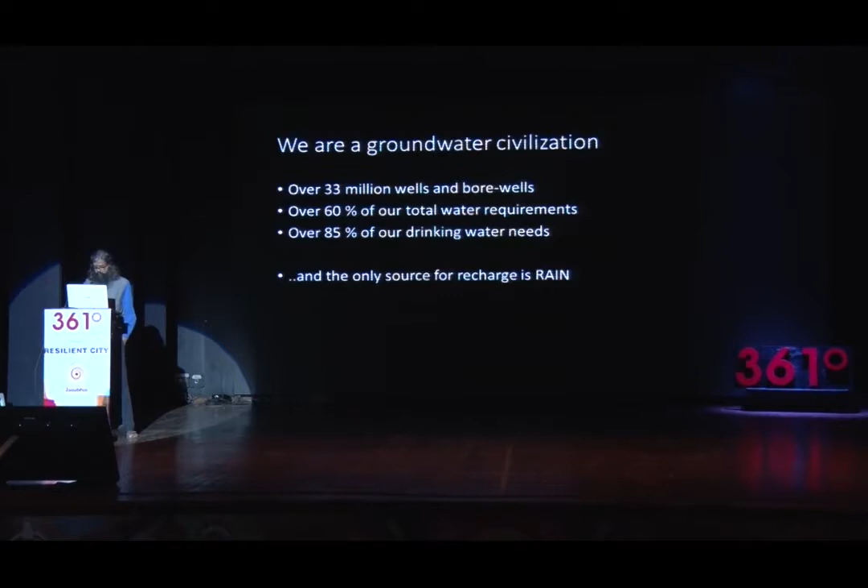Because it starts way back from the Indus Valley civilization, which is the culture of the well. Mohenjo-daro, Harappa, Lothal has this well, 2900 BC, 2300 BC, up to 1900 BC. Though called the Indus Valley civilization, the fact is that these people, and this was an urban civilization, mind you, drew their water requirements from wells.

And it's legendary, everybody knows in the Indian context, students know especially, that we had excellent drainage systems there, and that now we have to go to a Swachh Bharat to recreate what the Indus Valley civilization had done. Most importantly, wells were the source of water then. Wells and bore wells continue to be sources of water for us now.

So if you come to Sarnath, where the Buddha gave his first pravachan, his first preachings to his disciples, Sarnath is near Banaras, Varanasi. Sarnath does not have a river or a lake. Sarnath has a well, a series of wells. This is where the Ashoka pillar came from. Sarnath has this particular well. The well has water, and the water is sweet.

So are we privileged to be drinking the same water that Gautam Siddhartha drank? Are we blessed to not only listen to his spiritual sayings, but also be part of the endeavor of accessing good, clean water that the Buddha was part of? These are the kind of sustainability ideas around technologies, around artifacts, that we need to remember that we have in India. And when we design sustainably, can you think of anything sustainable for 2,500 years? Because we are talking about 260 BC, right over here.

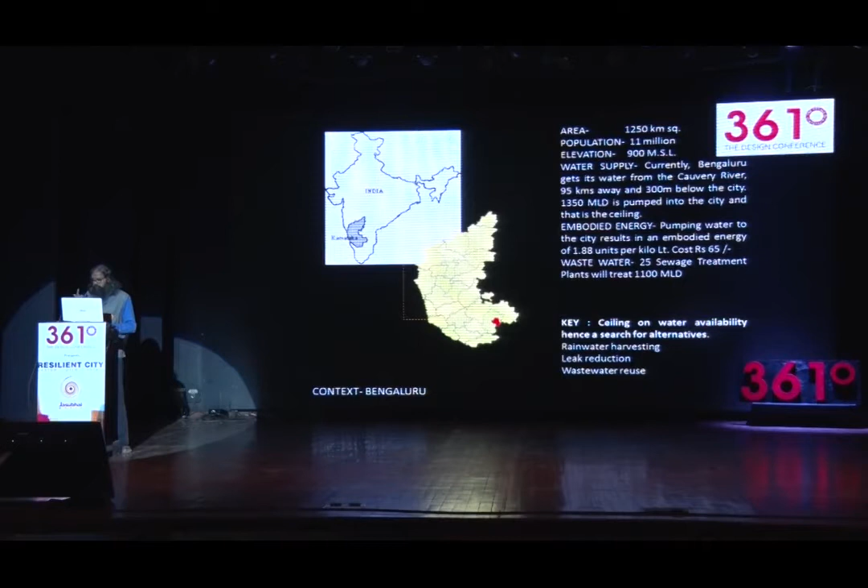But here's typical India, and this Indian city called Bangalore sits with 11 million people, 1,250 square kilometers area, sits on a ridge line, 900 meters, and is dependent on a single source called the Cauvery. There comes the challenge. How do you create resilience when your source of water is only one? And this is the city in a river basin.

So when we design resilient cities, we have to imagine ourselves hydrologically, place ourselves in a river basin and see how sustainable we are vis-a-vis the river basin. It cannot be the city itself which talks to its own waters. It has to talk to the river basin. And there are 4 dams upstream of the city of Bangalore, 4 dams in various districts on the Cauvery River. And all 4 dams play themselves to provide water to the city.

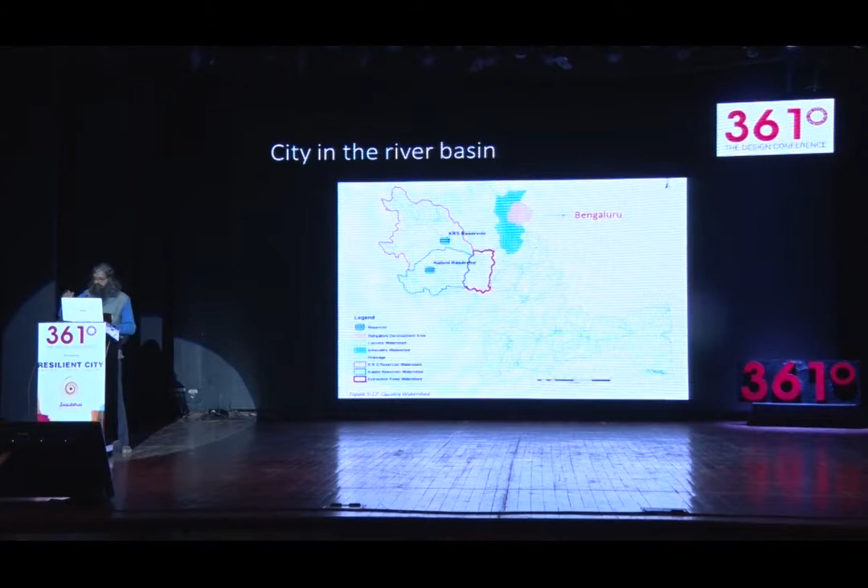The operation of these 4 dams works around provisioning water to the city first. Then if there is surplus water, that is used for agriculture, and if there's further surplus water, then it goes for industries. That's the kind of dependency we have created, that entire river basins have to move to feed water to a city. And here in this particular case, the Cauvery Basin waters are completely utilized. Not a drop of river water reaches the sea, except during heavy rainy seasons.

And even that water is exhausted, therefore the city has to think of going to another river basin 320 kilometers away to get water. The one other option before it is, can it go local? Can it do rainwater harvesting? Can it do wastewater reuse? And can it do demand management? This local versus the far away is the constant tension under which cities work.

And meanwhile, the city itself urbanizes, destroys green cover, destroys wetlands and lakes, prevents recharge by crusting, and I'll come to that, has intense rainfall events due to urban heat island effect, floods, urban flooding is a new phenomenon, and of course pollutes streams and lakes and groundwater within itself.

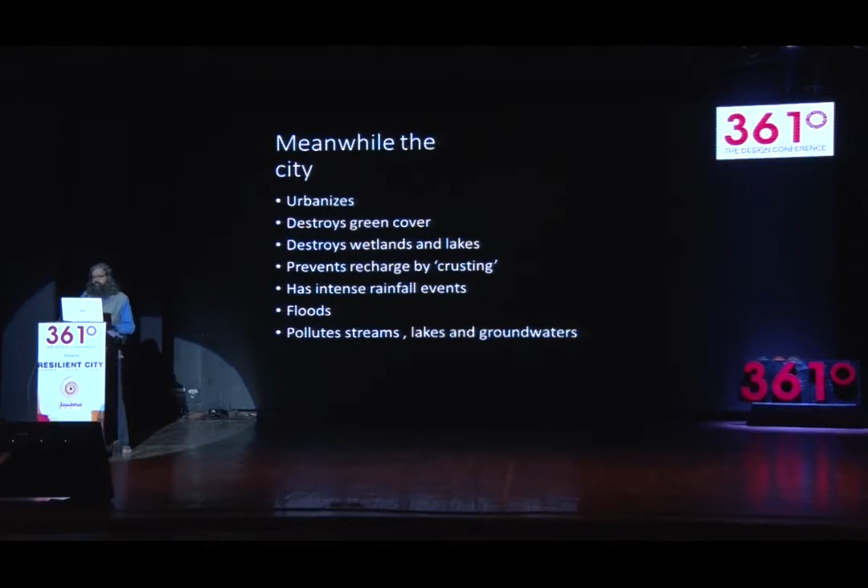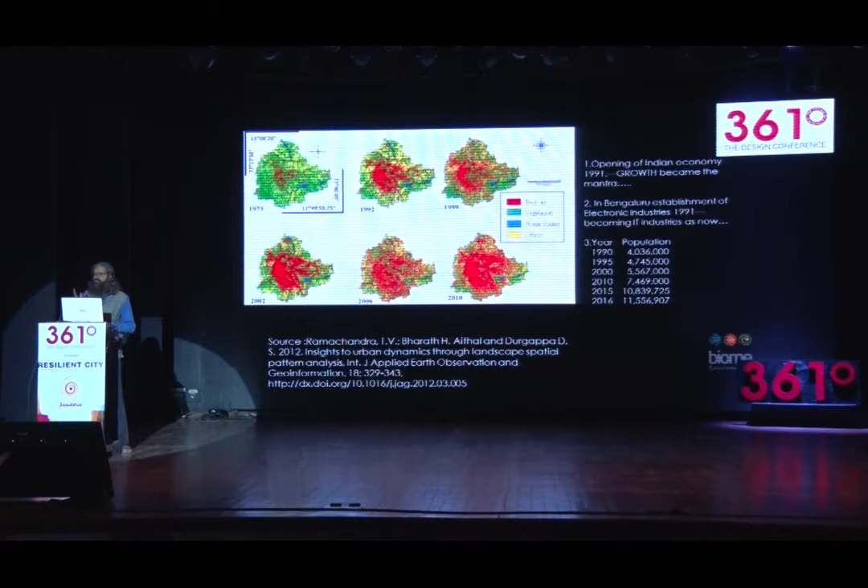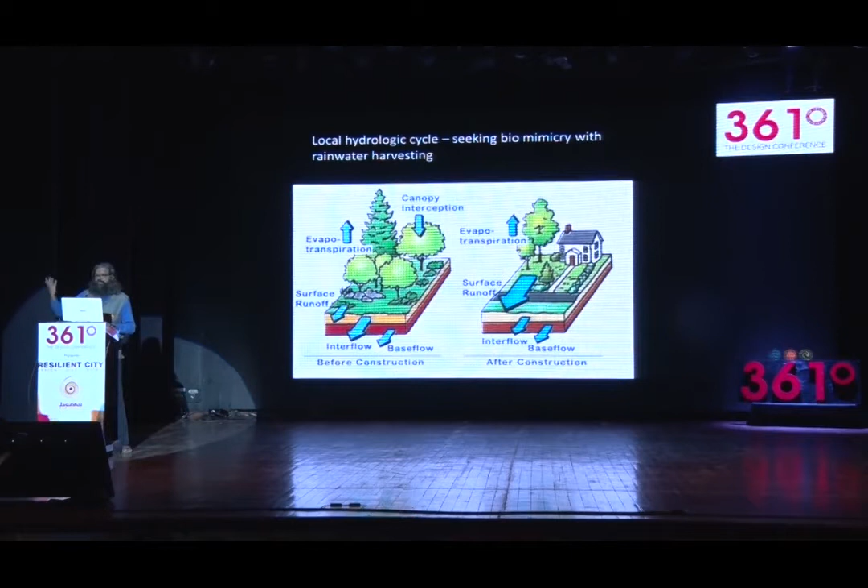And in this context, we have to start to manage water. So, what the city has done is to work around rainwater harvesting from individual homes. You start with the smallest unit, which is a home, and you look at the hydrological cycle in this home, right? What happens to the hydrological cycle on a 150 square meter plot area or site area? And I'll give you the numbers.

If the site is unbuilt, and those are the figures on the left, the surface runoff is between 10 and 15%. Recharge, which goes to the groundwater, is between 8 and 10%. 75% of the water stays in 1 meter of soil and evapotranspires.

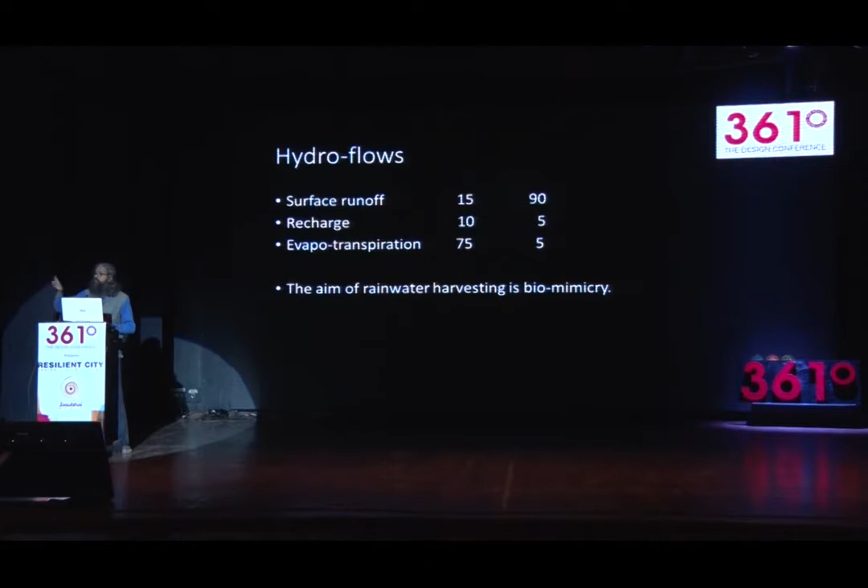The moment you build on it, the runoff now goes from 15 to 90. Actually, it goes to 100. So you've increased runoff from a site 6 times or 7 times, and therefore you're left with urban floods and you're left with no recharge. How do you reverse it is the basis of policy, bylaws, and design.

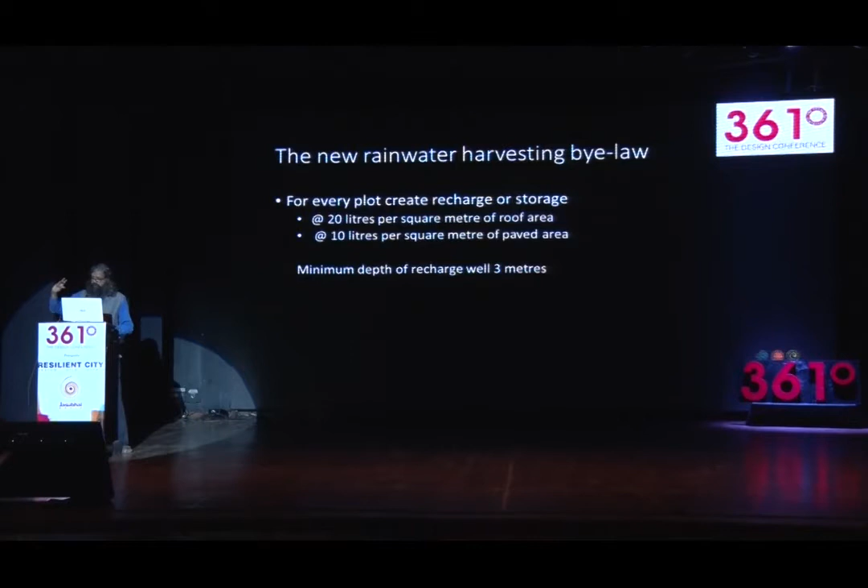And how you do that is by putting forward a law which says that for every square meter of roof area, the plot has to be responsible for 20 liters of rainwater storage or recharge. And for every square meter of paved area, you have to become responsible for 10 liters of storage or recharge. And when you make the recharge structure on the plot, you have to make sure that it's about 3 meters so that it bypasses the clay layer and actually gets into the aquifer. Simple policy bylaws can follow from understanding hydrological cycles at a site level.

And easy ways of harvesting rainwater, I don't have to show it to you. We have, I think, about 100,000 rainwater harvesting systems in Bangalore. The number can get even bigger. Is to stock up in rain barrels as such.

And then you move from the individual house or site to what we call layouts. These are essentially gated communities. And what do gated communities do? This is the design challenge for water. How can we convert water from an individual resource, a private resource, where everybody can sink a borewell and draw water, competing with the other? For example, in this layout, 360 plots, not connected to the city utility. So you would have had 360 straws, 1,000 feet deep borewells, taking water out from the same bottle, competing with each other. How do you reverse the process?

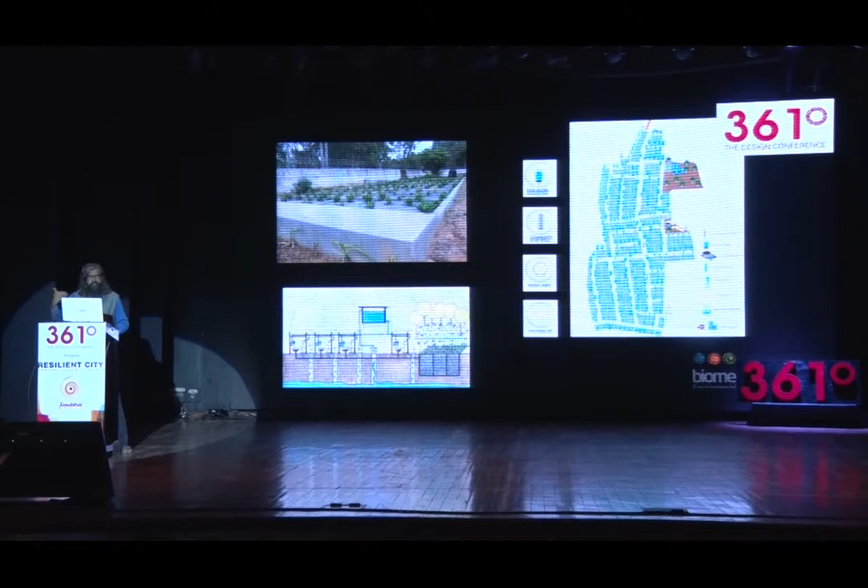The process is reversed by turning groundwater into a common pool resource. And what does a common pool resource mean? It means that no individual can sink a borewell, that the community sinks 3 borewells and supplies whatever water is there in the aquifer to everybody. Share that equitably. Then each one of the community members, those are the 360 plots, take responsibility for recharge. So each one of them picks rainwater and puts it into the ground, adopting the stormwater drain in front of it. And then what you have is sustainability.

Through demand management, you put a price on water and make sure that every family does not get more than 20,000 liters of water. Pricing is crucial. Demand management is crucial. Understanding the hydrology is crucial. Recharge is crucial. And communitizing the resource is crucial. Private market forces cannot lend themselves easily to sustainability.

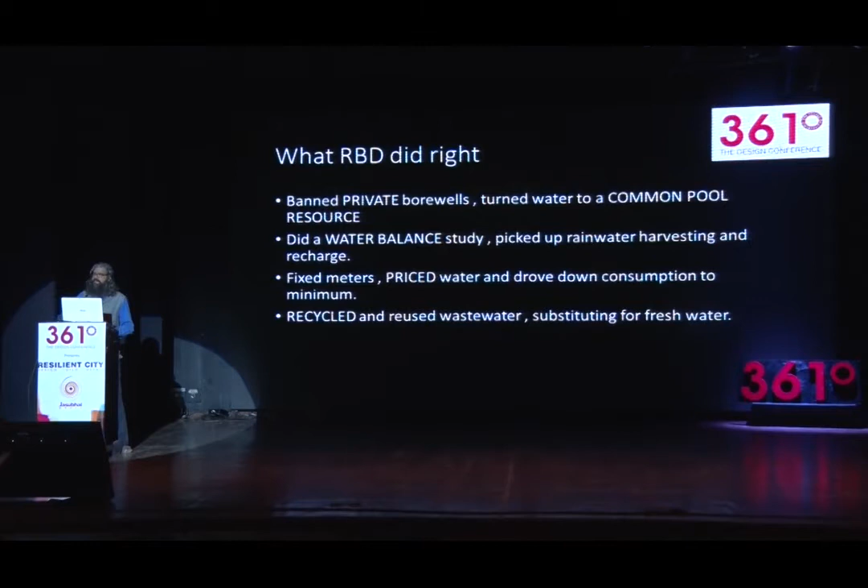And then you can recycle the wastewater which the layout generates at decentralized wastewater treatment plants, and reuse it for non-potable water use. So this, at units of 36 acres, 70 acres, and 100 acres, eventually perhaps the city, is our aim.

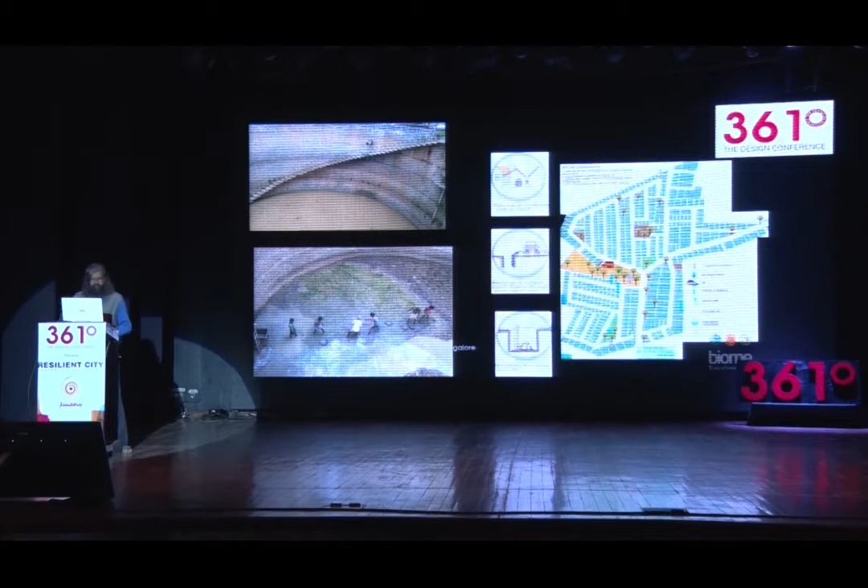Or for example, this 70-acre gated community, where you had this huge well, and because the community was not aware of the possibilities of the shallow aquifer, it had done nothing about it. But when they became aware, they cleaned 120 truckloads from this well, as you see on the left. And this well alone provides them all their water requirements for about 6 to 8 months, a 70-acre community. So understanding shallow aquifers, rainfall patterns, recharge rates and percolation is crucial to getting sustainability going at slightly larger scales.

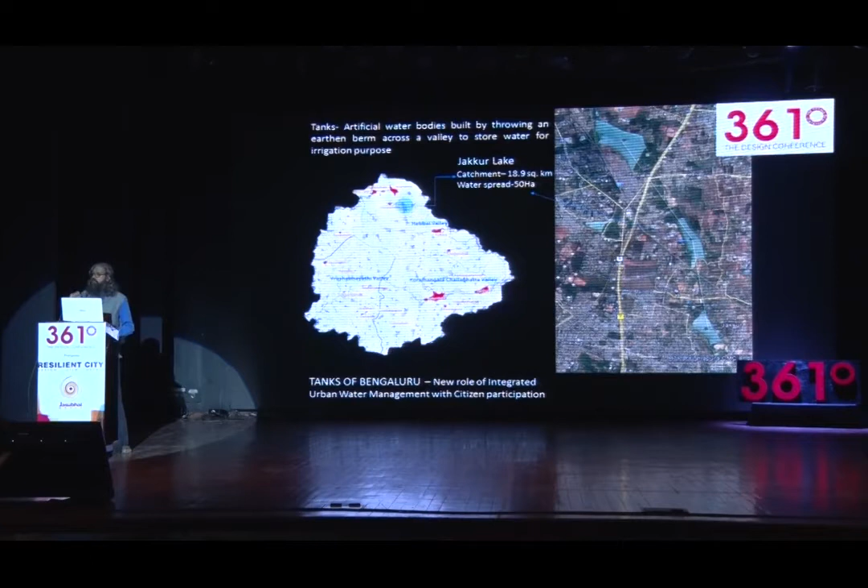When you're confronted with the fact that there are many departments of the government dealing with it, and this is just a sample, there are at least 14 departments of the government dealing with one lake or tank. So the crucial coordination comes from citizen groups. Citizens groups who adopt the lake and do the nodal coordination with each department.

So if it's sewage, you go to the water and sanitation utility. If it's garbage, you go to the local government, the Mahanagar Palike or the corporation, and so on and so forth. So that nodal coordination and creation of the group becomes crucial. And then the design kicks in. How do you do the design? See the figure on the right.

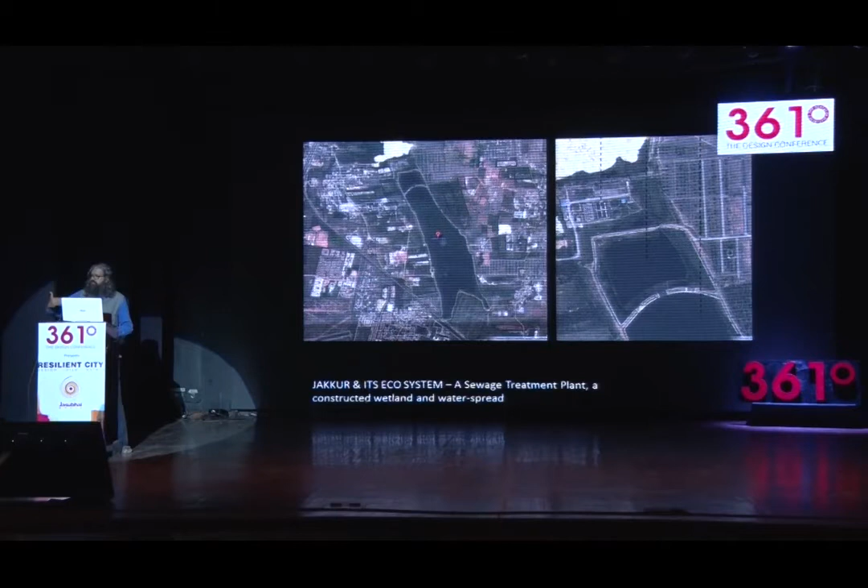A conventional wastewater treatment plant or a sewage treatment plant, 10 million liters per day, followed by a constructed wetland. So the water is further polished once it comes out of the wastewater treatment plant, and then it goes to the lake. And the lake then allows for fishing to happen.

Remember, crucial to all this is not the technological knowledge, but how do we keep it financially viable. A sewage treatment plant is financially a sinkhole where you're just putting in money and you're not getting returns. But if you can convert the ecosystem for it to become remunerative, then perhaps you have a sustainable system. The fish in this case can pay for the running of the sewage treatment plant.

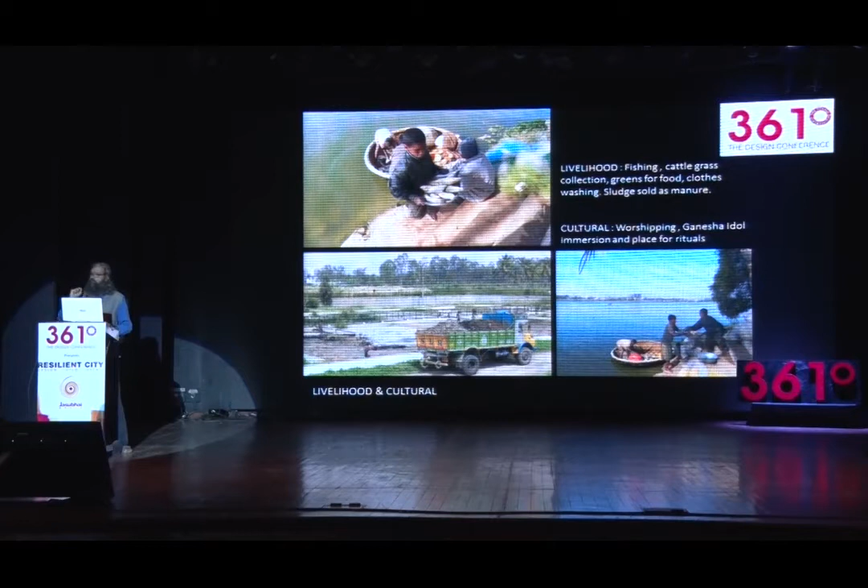This one truck comes every 2 days and it sells for 10,000 rupees. And the manure is excellent for farming and cultivation, provided it is free of heavy metals. We need to keep that check in mind. But there are ways by which we can organize wastewater treatment systems with ecosystem design to make it financially viable.

And then the benefits are that it recharges groundwater, and this well, for example, is now recharged actually from wastewater by removing the yuck factor, going through a wetland, going through a lake, percolating down, coming into a well, and by this time the water is good enough to drink. And there's no psychological barrier for it.

So this lake, which I showed you, called Jakkur, can recharge about 7.5 million liters per day. At 100 liters per capita, it can provide 75,000 people with water, and it's actually wastewater converted to drinking water.

So these are the systems by which we want to take it to further lakes, and today we are inaugurating another project of the same nature, 10 million liters per day, which can replicate itself across not only Bangalore city, but across India, where you link lakes, wastewater treatment plant, groundwater, and drinking water potential. Sludge from the treatment plant, as you see here, is excellent manure for the crops, so it provides livelihoods for farmers who surround the hinterland of a city.

So the design challenge for us is more the institutional and governance architecture challenge. The coordination challenge, getting people to talk to each other and institutions to talk to each other and designing systems that work continuously, because it's easy to design a system but difficult to make it run.

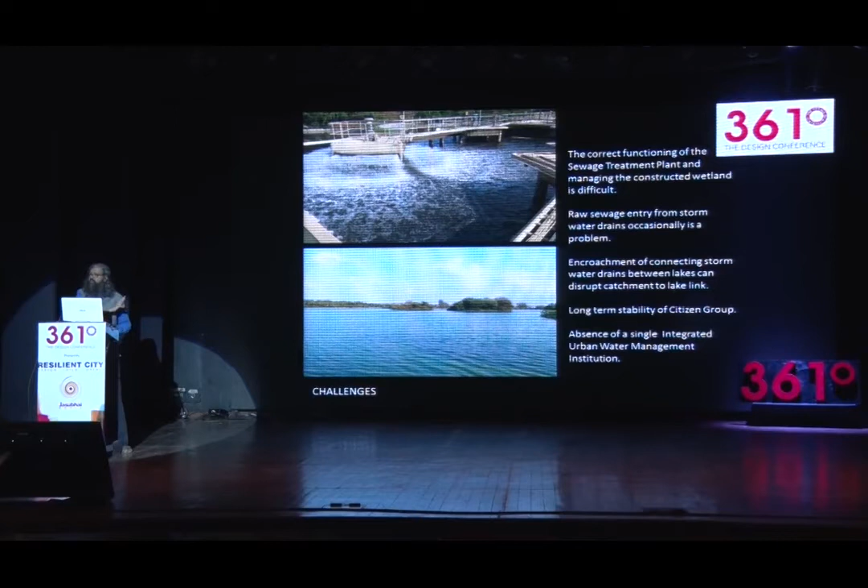Especially Bangalore city has lakes which catch fire, which foam, so there's negative press all about it. How do you get the positive stories to roll themselves out more is also a big challenge. And replication. So replication means once you do a good design, you take other members, communities, show them, and make sure that it gets translated to further action.

It's not about scaling a project by one institution, it's about replication by many communities. So it's a million solutions rather than one big solution. For example, you see that the fisherman is a key stakeholder who makes sure that the water hyacinth is removed once every month.

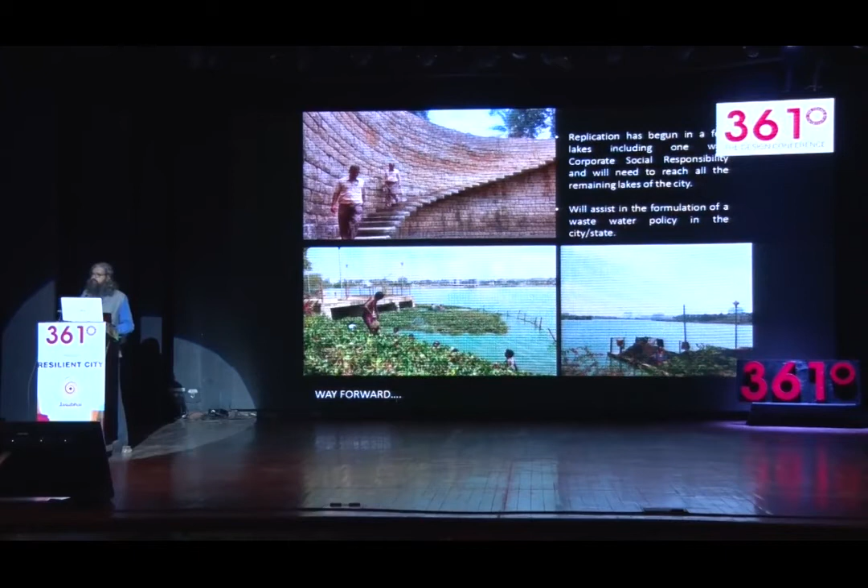Once the fisherman becomes part of the solution space, then you get the lake to be cleaned and maintained. And so this wastewater can then be converted to a resource and lakes can be protected. So I think water sustainability in urban India will come by a combination of using rainwater, sewage treatment plants, lake rejuvenation, and groundwater, which is called water-sensitive urban design in Australia, which I'm sure you'll see examples of, or integrated urban water management as a design concept.

And as designers and as architects, we have to think of the entire ecosystem, as I mentioned to you, the legal framework, the ecological parts, the thinking from linear to circular at city scales, and the setting of good examples and getting communities to own such solutions. This is what I had to share with you.